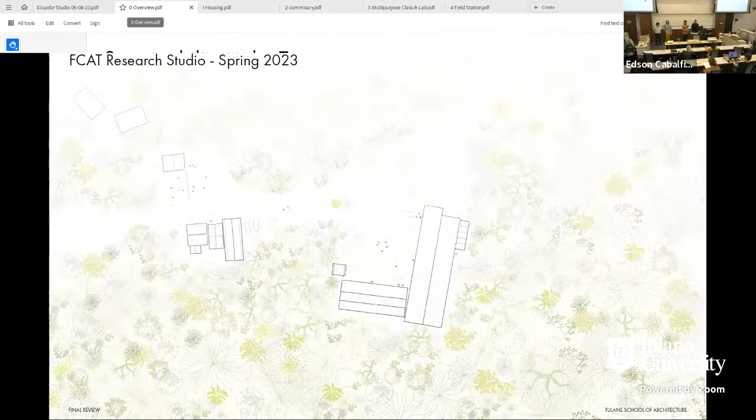My name's Tom. Thank you for being here, both in person and thousands of miles away in Ecuador. This is our presentation of work from our Architecture Research Studio at Tulane University. The studio focused on sustainability in the tropics. We were lucky enough to work with some fantastic partners at FCAT, or in English, the Foundation for the Conservation of the Tropical Andes. There are 13 of us students in this course whose work you'll be seeing today. Of the 13, 5 are graduate students and 8 are undergraduates. We all have various backgrounds and come from different parts of the country and world, but share a common love for design. Our professor is Dr. Edson Cabalfin, who has kept us on the right path since day one.

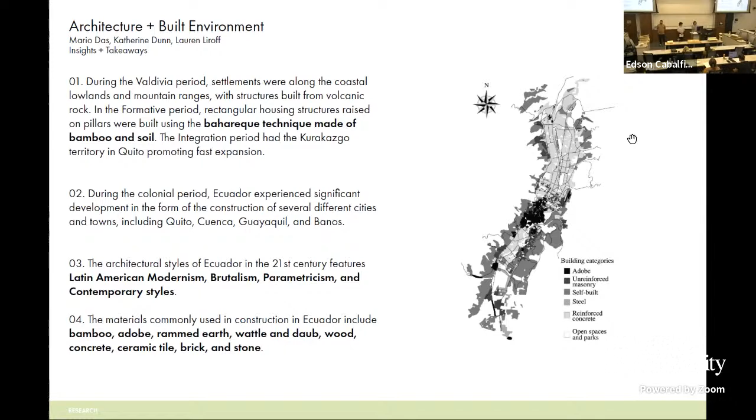Ecuador is home to some of the most biodiverse environments in the world. Esmeraldas alone hosts several different ecosystems, including mangrove, lower evergreen, and lower montane forests. Unfortunately, continued human activity centered around resource extraction has led to the destruction and deforestation of these incredibly unique regions. Ecuador's architectural history has been strongly influenced by the different periods of the country's history. Traditional building methods include the use of adobe, bahareque, rammed earth, structural bamboo, and more recently, concrete. The country's modern style spanned from Latin American modernism to brutalism and parametricism.

The second of the 2 research phases began to hone in on some of the topics that would be especially important to consider before moving into the design phase. This research focused on more human-oriented topics like decolonization and public interest design, before narrowing the scope to investigate more architectural topics like materials and the principles of construction for the region.

We first looked at the idea of decolonization as it applies to our role in this project, which can be understood for this context as honoring indigenous practices, decentralizing Eurocentric ones, and creating non-hierarchical power structures. Next, we investigated public interest design. We gained some key insights about how to make our designs human-centric and specific to their users. We also learned important information concerning the priorities of nonprofits and how good humanitarian design should advance the abilities of nonprofits by improving the existing spaces and facilities.

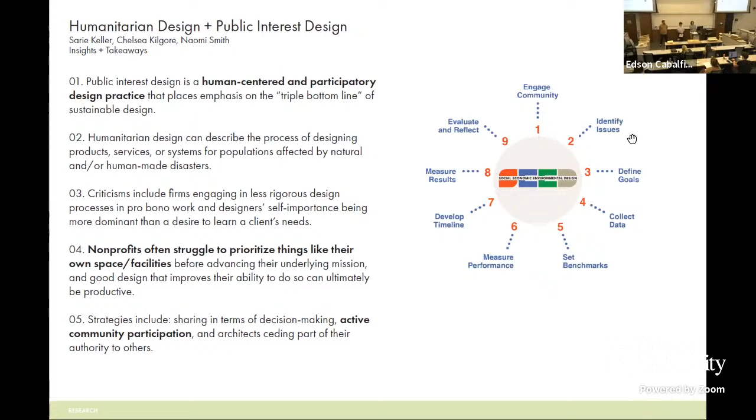We then dove deeper into specific construction methods and materials, as well as considerations for how we could implement them into our designs. Topics for investigation included structural bamboo, mycelium brick, bahareque, and concrete, most of which made it into the resulting projects in some form.

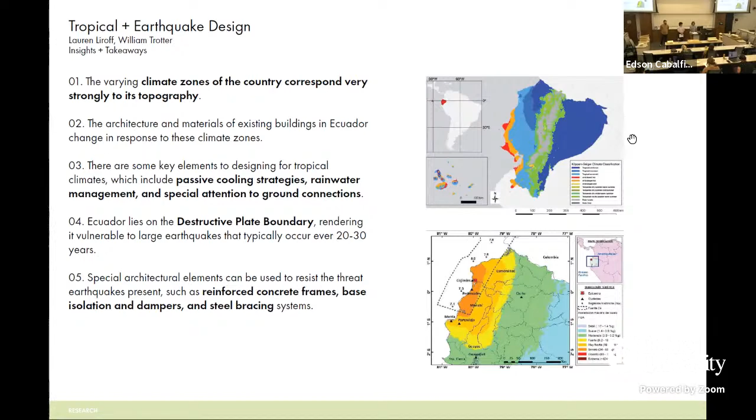I'm now going to hand things over to Anna Kathryn on Zoom, who will discuss some of our assumptions prior to our trip to Ecuador, as well as some key takeaways from our midterm proposals.

Thanks, William. The research was vital to our understanding of the site and prompted us with a few questions that led to our first design iterations. Before we visited Ecuador, we wondered about building materials, the rain and the mud, and what the topography was really like. We were also really lucky to have such amazing feedback from everyone at FCAT to help us through our design process.

About halfway through the semester, our studio had 13 different proposals. After conversations we had while in Ecuador, we've been able to consolidate our design ideas into 4 projects. I'll present the midterm work to show a glimpse into our design process throughout the semester.

The housing group initially explored designs to house all different users, including FCATeros, students, and ecotourists. Each proposal occupied a different site on FCAT's grounds, from the bottom of the hill to the very top, even a series of buildings that expanded into the forest. Some provided a lot of privacy, while others had less privacy for more people. Each design carefully considered the topography and reacted to the environment thoughtfully and creatively.

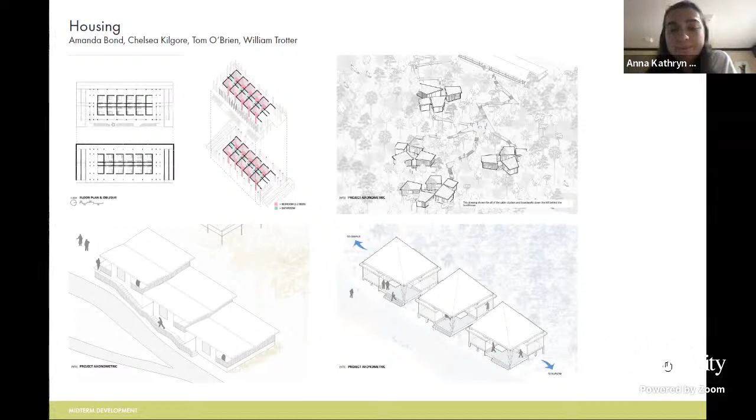Next, we had a few new ideas for the commissary. One proposal focused on retrofitting the existing commissary and adding garden space adjacent to the kitchen, increasing functionality and structural stability. The second proposal relocated the commissary down the hill and converted the existing commissary into housing. This created campus zoning, where the upper campus is designated for sleeping and the lower campus supports gathering, eating, and socializing.

The intent of the multipurpose classroom centered around spaces to be. This proposal focused on creating a flexible space that is open with potential for smaller private spaces to relax when not in a class, dining, sleeping, or conducting research. The new multipurpose classroom creates a new quadrant in connection with the existing commissary and bunkhouse. The main goals were to create a flexible space for meeting and relaxing, a dedicated lab space for local and visiting researchers.

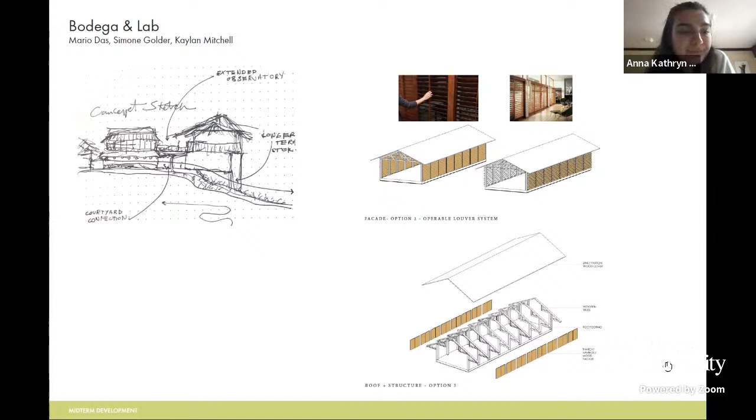Finally, we have our field station designs. The original proposals were 3 different forms suited for 3 different users: one was a researcher, one an FCATero, and another the ecotourist. While there were specific amenities associated with each user, the main point of each field station was so that it could be a small, multifunctional unit that could be placed in many different site locations, and even more remote ones.

So in response to the feedback on these proposals, some questions that arose included what facade system would be effective against the bugs, humidity, and rain? Is FCAT interested in exploring ways to use local materials, or would they rather stick with concrete? And what is the day-to-day life of the FCATeros like? All of these would be addressed during our trip to Ecuador to visit the site in person.

So we spent our spring break in Ecuador getting to know the site more intimately. At FCAT, we learned about their reforestation work, measured the topography, and got to see many parts of the reserve. It was valuable to spend so much time with the very people we are designing for, which helped to understand the very specific needs of the place. This and ground truthing our initial assumptions were the most important parts of the trip.

We all presented our work to the FCATeros, which is where the most significant feedback arose. They shared their opinions on materiality, siting, and overall arrangement of the site, often making points that we had yet to consider, such as the need to play music before meals.

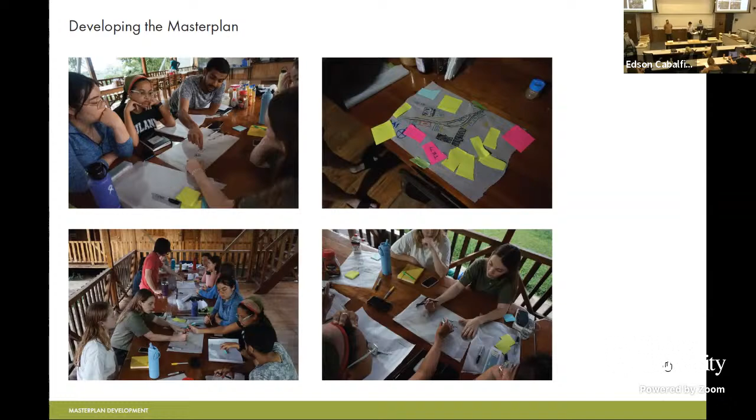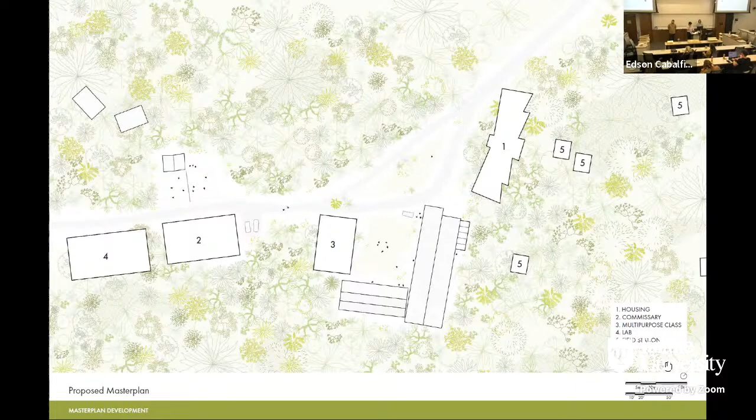To further explain each individual proposal, we will walk you through a day in the life at FCAT: imagining someone waking up in a new housing building, eating breakfast at the commissary, taking a class in the multi-purpose space, and then going out into the field station to complete some research.

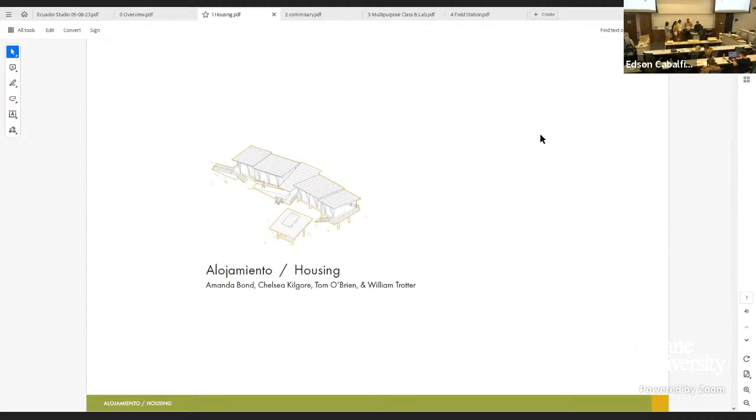Amanda, William, Tom and I team on housing. The first thing FCATeros would experience in a day in the life at FCAT is waking up in their new housing. While in Ecuador, our group discussed previous housing proposals with the FCATeros and learned a great deal about what spatial characteristics were important to provide. Our discussions had central themes of privacy, material longevity, and social gathering space, among others. As a result of the feedback, we pivoted to designing housing specifically for FCATeros.

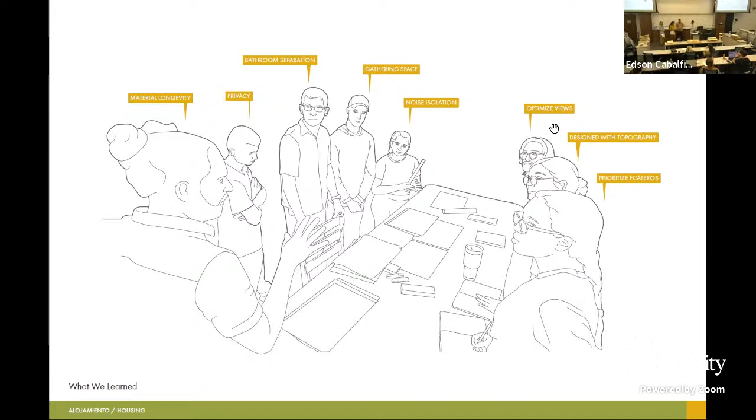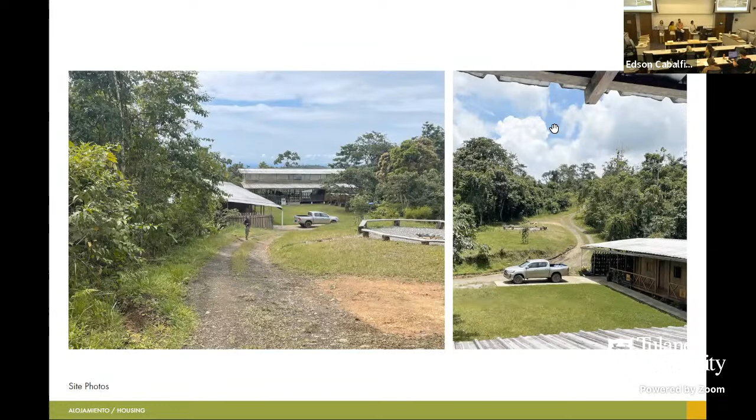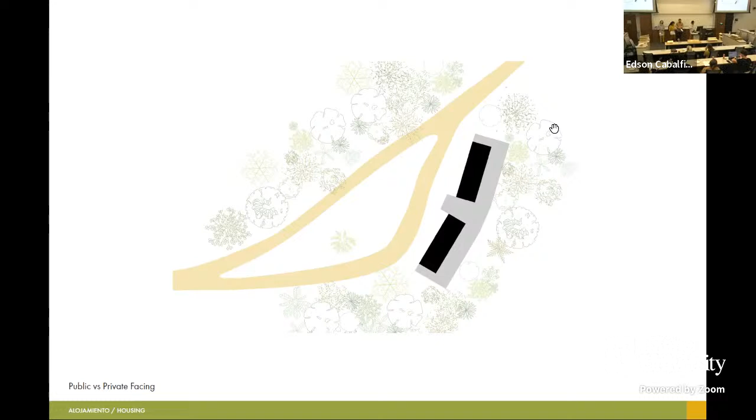From there, the massing was split in two to create a breezeway condition and a central gathering space, which was deemed requisite, similar to the existing house. The design was then separated into public and private spaces, with private rooms along the front face of the building, shown here in black, and more public space facing out into the forest, shown here in gray. The floor plates of the building were then fragmented and terraced down the existing slope of the hill, conforming to the existing topography of the site. Each floor plate was slightly angled to create directed views into the forest.

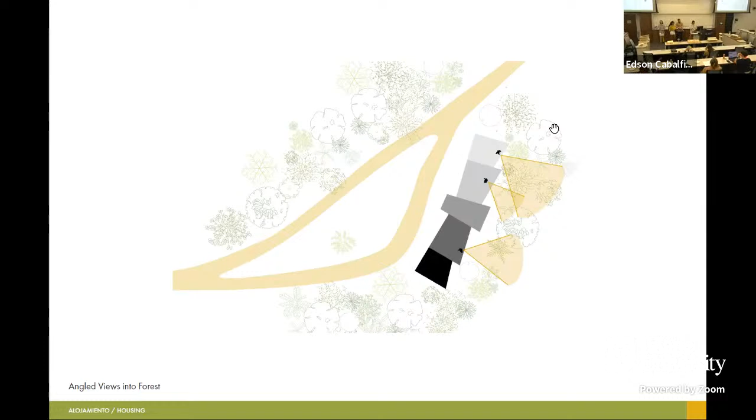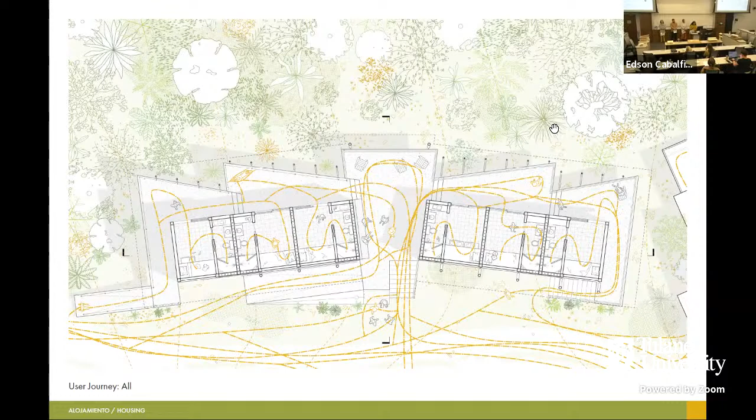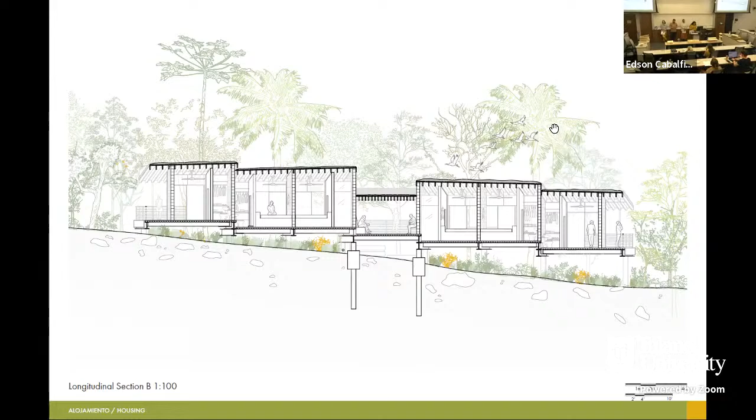With the orientation of the roof slope, shade is provided to the interior rooms and balconies throughout the day, allowing for a more diffuse light condition through the clerestory windows and sliding doors. Thatch roofing also ensures that the corrugated steel roof deck is not exposed to direct sunlight and heat, thus keeping the interior cool throughout the day, but retaining its insulating power at night.

It also becomes possible that the roof area may be utilized for solar panels to provide energy for the house. The roof slope also allows for rainwater retention systems to be implemented, where rain runs down the roof into gutters, down through the column, and into a storage tank installed in the building.

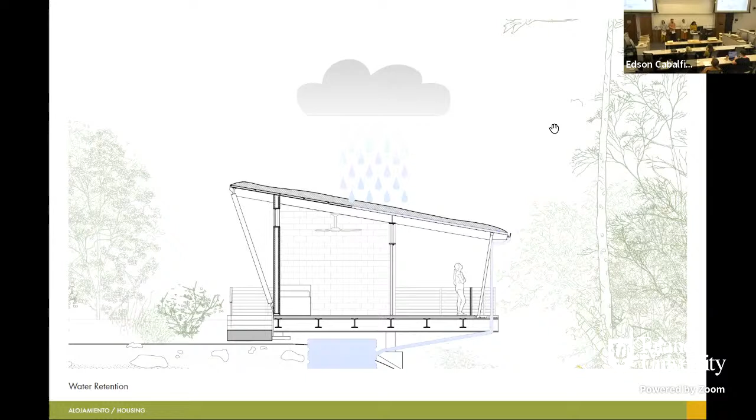There are also passive ventilation strategies implemented, where hot air may leave the room through clerestory and awning windows on both primary facades, allowing for cooler air to enter the doors. There are also active ventilation systems in the form of ceiling fans.

Which brings us to the construction methods used on the north-facing facade. The primary floor structure involves site-cast concrete footings, which then support a corrugated steel floor deck and concrete finished floor. The main structural walls are made of CMU, and a double-skin bahareque system is utilized for the non-structural walls. The bamboo cross-braced columns, held by steel pin joints, are a major facade element.

The cable railing is also utilized to minimize interference with views. Lastly, the roof involves the use of CLT rafters, on top of which is a galvanized roof deck, wooden purlins, and a thatch.

The balcony side utilizes similar strategies as the roadside facade, with the exclusion of the bahareque. Instead, wooden and glass sliding doors are utilized to be able to open or close the window outside. Furthermore, a steel gutter is used to connect the PVC piping that runs through the bamboo columns, making up the water retention system.

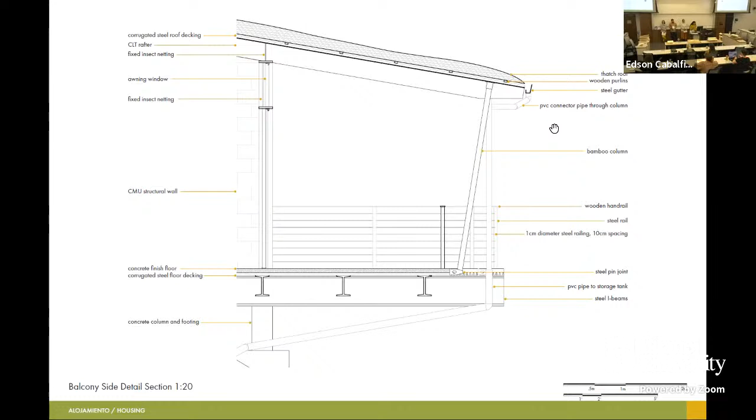And here we can see the material palette of the structure as showcased in the details. Thatch for the roof, CLT for the rafters, corrugated steel roof and floor decks, CMU and bahareque for the walls, as well as bamboo for the columns.

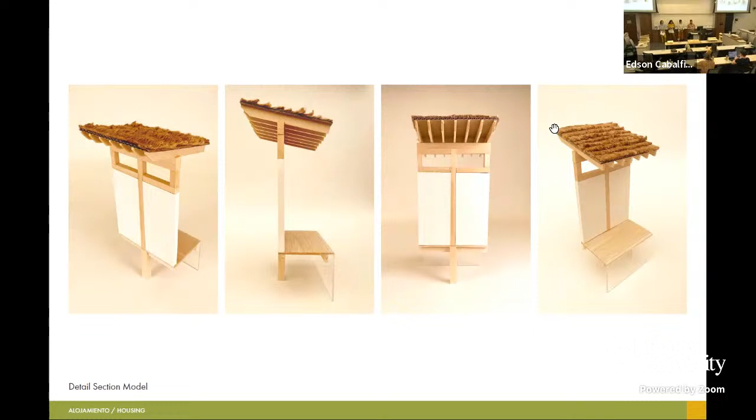This section model shows the cross-laminated timber structure. The walls depicted here are not hollow cavity walls. Instead, they are bahareque infill. The roof joists support a layer of plywood and a layer of steel decking that is then enclosed by thatch.

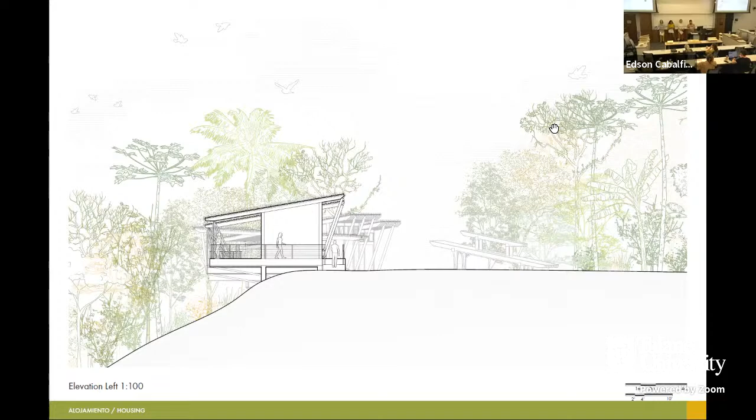The elevation of the left side of the building shows how it drops down and curves around the site as you approach the main campus from the top of the hill. A ramp in the front of the building leads to an accessible bedroom unit in the back.

The back elevation shows the social life of the building. Private bedrooms face out towards the forest with large sliding glass doors. In this drawing, you can see how the thatched roofs drop down with the landscape and collect water for the retention tanks that sit beneath the large central gathering space.

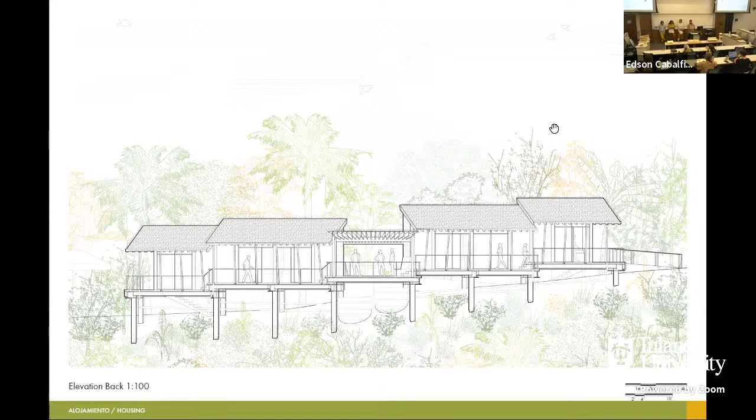A thatched roof acts as a noise buffer against potentially loud rainstorms. Four of the roof structures slope down toward the forest, stopping the sun from heating up the bedrooms, while the central roof opens up towards the forest, allowing for greater views.

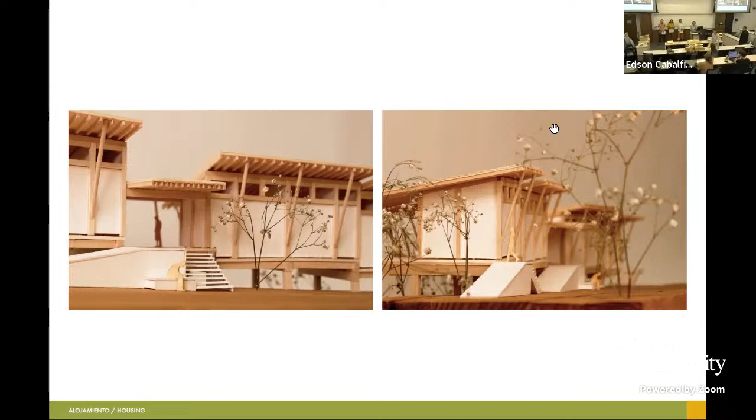On the other side of the model, we get a glimpse of the balcony experience as it hovers over the steeply sloped vegetation. You can also clearly see how the roof lines correspond to the ascending floor plates, with the exception of the counter-sloping roof that projects out from the central space.

Last, we get a dramatic look from below, showcasing some of the substructure that achieves these seemingly hovering cantilevers. We also can see a glimpse of how the balcony might be experienced in perspective. The sloping roof supports create an organic wavy effect.

Moving into the perspectives, we get an idea of how the design may actually be experienced. This view shows the building's relationship to the rest of the campus just down the road. The design invites people to come and go as they please, with stairs and ramps running parallel to the road, and the main entry projecting outward, beckoning you to enter. It also showcases the shading effect of the roof lines and the privacy achieved by the high windows that face the campus.

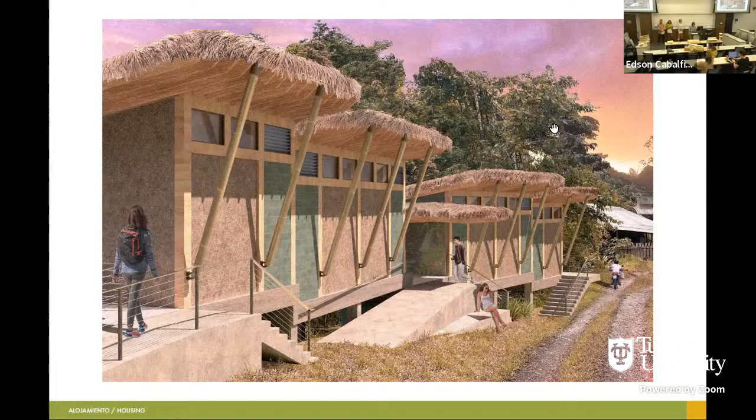The balcony spaces provide ample room for socializing, bird watching, or even hammocking, as you can see toward the back. The large sliding glass walls of the bedrooms offer unobstructed views out toward the forest, while curtains provide the option for extra privacy from this path of circulation, if so desired.

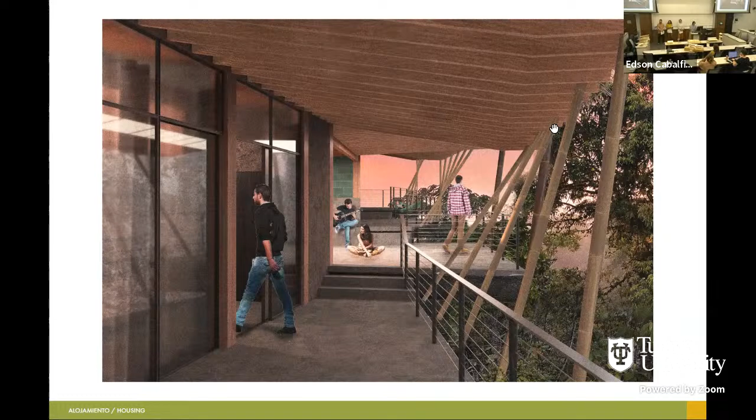This drawing shows the building again, located in the context of the site. And from there, one could walk down the hill to go see.

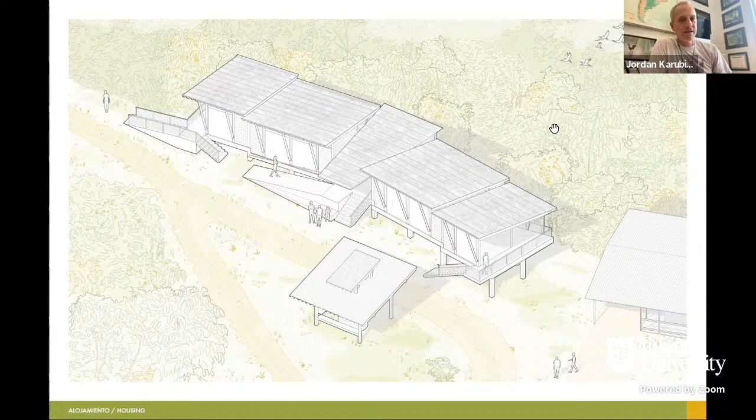The question I had is, with this structure you're showing here, have you thought about housing for men and women in particular? Is that a theme you've thought about, whether it would be intermingled or whether there's separate blocks depending on gender? Well, right now it's designed to be mixed gender, but because it's split in the middle, it could be divided into men on the left and women on the right as one option. But right now we haven't designed it specifically for a gender divide.

Okay. You mentioned glass, and I wanted to ask, because I don't know what group is going to talk about it, but I'm assuming there's going to be a group that talks about the challenges of glass that birds fly into. So did you all think about glass as windows? I'm opening that up, I don't know who I should ask that to, but I know it's an issue.

So we tried to keep most of the glass on the more protected facade of the building, and in addition to that, there are glass options available to be coated in special reflective materials that signal to birds that there is a surface there. So there are ways to counteract that. There would still require some cleaning and maintenance of the glass, but nothing major. And is it available in Ecuador? Yeah, that was supposed to be, yeah.

I'm curious about the material choices and structural systems you guys are deploying, because it seems like you've decided to add a little bit of all the systems. You've got a cast in place foundation, a poured in place concrete floor, a CLT structure, and a thatched roof. Is that right? Yes. Can you talk us through the decision making there? I can kind of understand the pieces and parts, but also the logistics of these different types of materials. I can see some benefits and some drawbacks to your approach, and I'd love to hear you talk through your decision making process. Yeah, I mean, it is quite the mixed bag, right?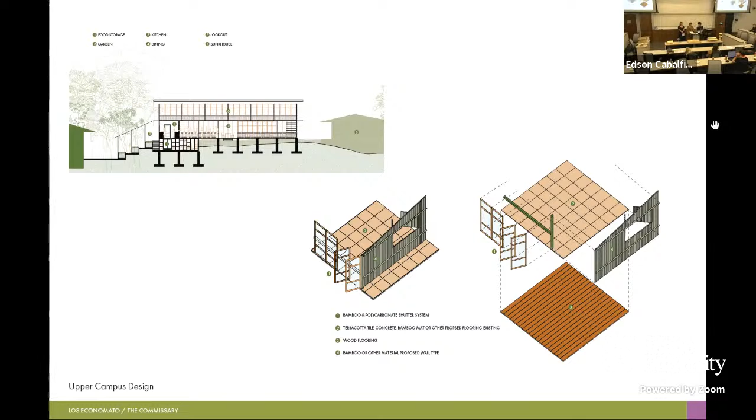We understood the importance of thoroughly evaluating the structure and its limitations. The upper campus scheme acknowledged the current building's limitations and aimed to optimize the space by redesigning the layout and addressing structural issues. This approach aligned with the principles of sustainable design, encouraging maximized use of the existing structure and resources to minimize waste.

On the other hand, the lower campus scheme presented an opportunity to envision a new, purpose-built commissary that could better meet the needs of the community it serves. It was also financially more sustainable regarding the need to address issues with the current commissary annually.

In the design, the additional housing for the cooks helped improve the quality of life for the staff, increasing satisfaction. Moreover, the larger kitchen and extensive storage space helped enhance the quality of food preparation and experience for students, faculty, and staff.

Following our meeting, once we finally went to Ecuador and met with the kitchen staff in EPCAT, our group gained a deeper understanding of their requirements. Based on these insights, we decided to proceed with the lower campus scheme to address these needs.

In terms of determining the location of the commissary on the lower campus, we addressed various factors, including proximity to the existing kitchen and dining areas, accessibility, and available space.

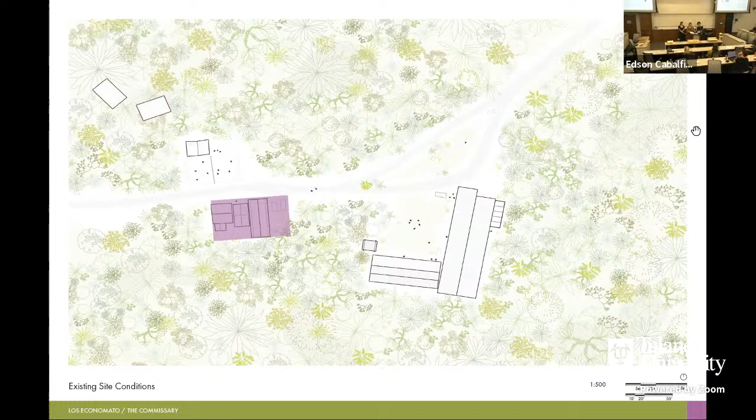After careful consideration, we identified a relatively large area of flat land located across from the Ecuavolley courts, where the nursery and composting beds currently exist. This location presented an opportunity to repurpose the space for the commissary to better meet the needs.

The design locates the front of house space closer to the main road and pathway connecting the upper and lower campuses. This placement facilitates easier access for visitors and also promotes a sense of openness and welcoming.

Conversely, the back of house space is positioned closer to the trees and vegetation, creating a visual buffer between the private and public areas. This placement helps shield the private areas from public view and ensures a greater degree of privacy for the occupants and cooks.

Moreover, the public dining space is designed to be very open, providing a welcoming atmosphere for diners. The layout is arranged in a manner that optimizes traffic flow and facilitates easy access to different areas of the dining space, creating a more inclusive and active environment.

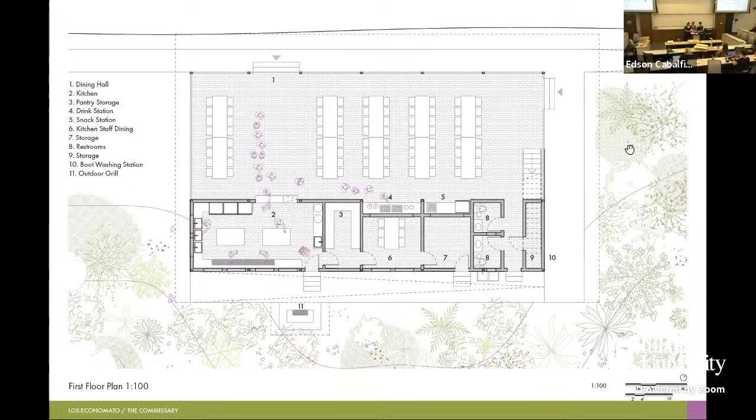Something to note here is the relationship between the kitchen and dining space. The cocineras explained that a snack fridge separate from the kitchen would help them feel less disrupted when the efecteros need to grab some fruit or food to go, which also makes this food more accessible to the efecteros and visitors alike.

The large opening between the kitchen and dining space allows the cocineras to see clearly into the dining room, which they explained was necessary to ensure that everyone gets a plate at meal times.

Within the kitchen, it was clear that they needed additional fridge space, additional counter space, and ample burners, all shown here, along with more additional appliances and additional sinks for washing, prepping, and so on.

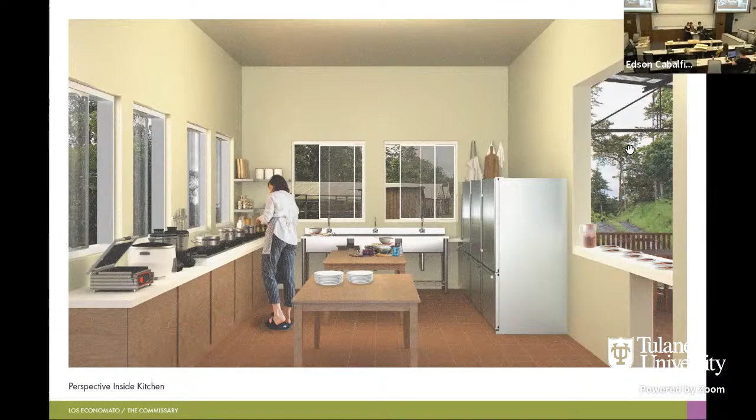The second floor serves as housing for the kitchen staff, with comfortable accommodations for up to 9 staff members, including a private bedroom for the head cook, Maria. They share a restroom with 3 water closets, 3 sinks, and 2 showers. A communal balcony on the far left side provides space for staff to relax and enjoy the views after work.

Within the bedrooms, there's enough space for all the cooks to sleep and store their personal belongings. Since the openings are oriented away from the road, they can take in the view of the trees and have some privacy. Like the existing bunkhouse, the beds include nets to protect from mosquitoes, and the operable windows are screened for the same reason.

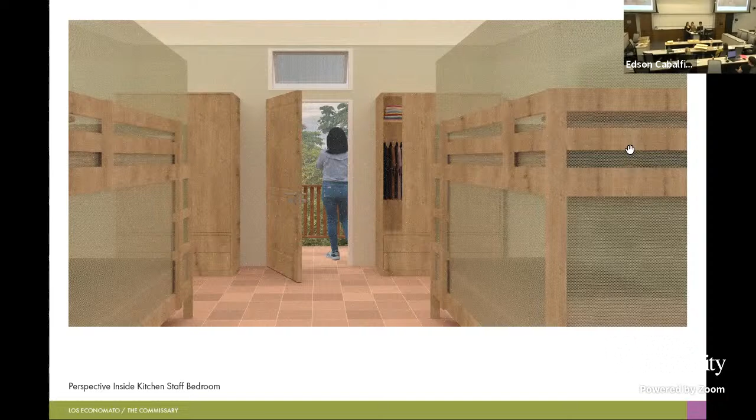Along the road, the commissary is placed at the edge of that flat clearing we mentioned earlier, at the base of the hill to the upper campus. An ample overhang covers the path in front of the commissary. A terrace garden could be constructed going up the hill to improve food production as well.

Another chef joins to cook, entering from the kitchen's folding counter in the main dining space before cooking at one of the 2 islands. A few members of the kitchen staff join to cook, circulating between the stoves, fridges, and sinks, creating this triangle, which is well known and good for workflow in a kitchen, while keeping that in mind when designing the kitchen.

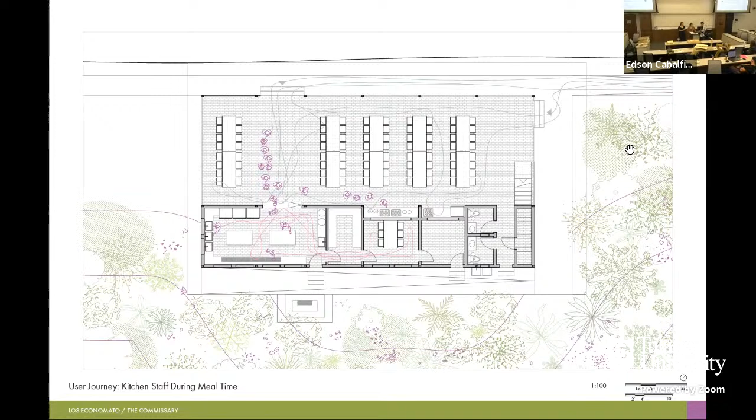When the Epicateros return after a day working in the field, they'll come to the boot cleaning station where they'll take off their boots, spray them down, and then be able to enter this space.

This drawing offers a cross-section view of the building, highlighting the separation between the public and private areas, while also providing a better understanding of the roof plane. This section provides valuable insights into the building's design, showcasing its ability to seamlessly integrate with the surrounding environment.

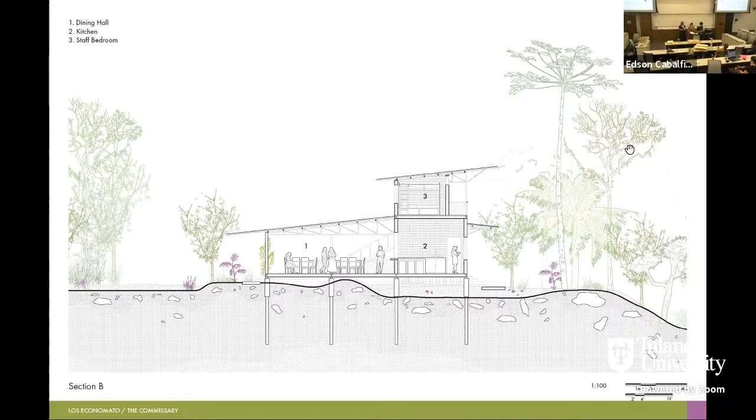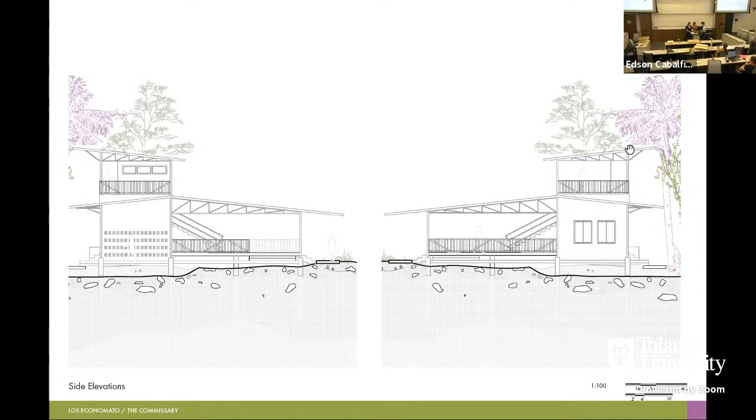This is the front elevation of the building, and it expresses the solidity and openness with the windows located strategically to allow light and airflow, and transom windows are in the more private walls, such as the storage rooms and restrooms. The two side elevations display the ceiling, roof, and structure construction. The back elevation emphasizes the openings for views and airflow circulation.

The back of the building is designed to be more private, with a focus on the internal program areas and the views to the scenery outside.

The new design aims to create an efficient and functional space for the commissary, with careful attention paid to circulation, program proximity and exposure, kitchen staff needs, and the comfort of staff and guests.

In Axon, you can see all of the roofs are tilted to allow for rain flowing off the building, with an ample overhang in places where people need to walk. The orientation of the largest roof planes is such that solar panels could be added in future years, addressing the energy needs at FCAT. Structurally, the exploded axon begins to show how the building is assembled.

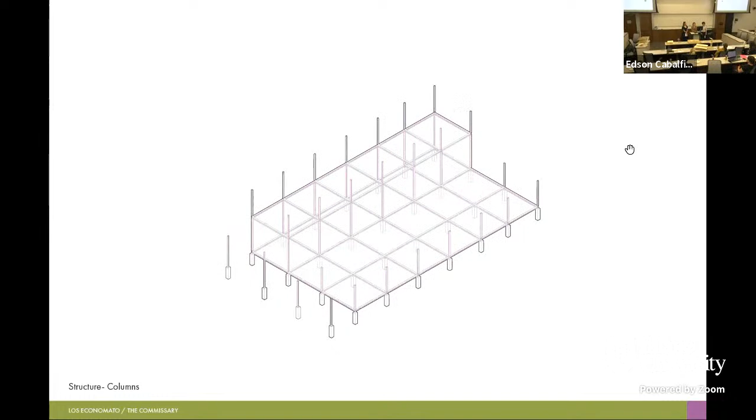Going into the assembly of the building, you start with the footing, the beams and the girders, the columns, trusses, purlins, and the roof plate.

Looking at the materiality of the building from the ground up, we decided terracotta tiles would be a great use for the floor after talking to the kitchen staff, because they're both replaceable and durable. Looking at the walls, we decided to use fiber cement sheeting because it works very well with the conditions and is easy to assemble and work with, with a waterproofing membrane additionally for the humid, wet environment.

We have simple steel gutters connected to the corrugated metal roof. For the windows and screens, we would have a bug screen on one of the outer layers of the window, as well as an operable single pane window.

Ventilation is really important, especially in cooking, because there's a lot of heat generated. In the kitchen itself, there are multiple windows that allow flow through both the dining space and those open window spaces, and the stoves will be located near these windows so that when they use the LPG, they can open them. Same goes for ventilation above.

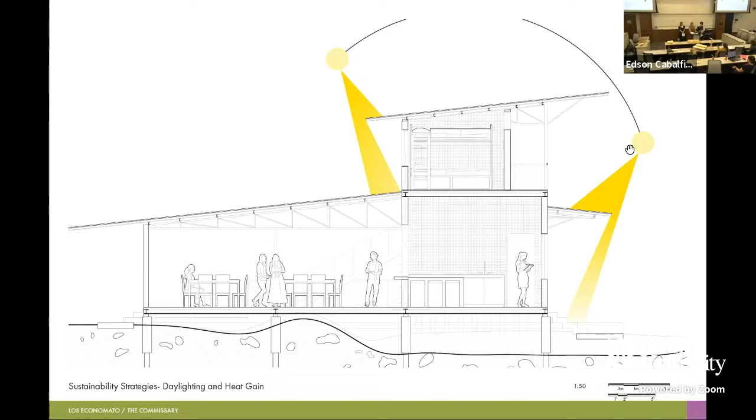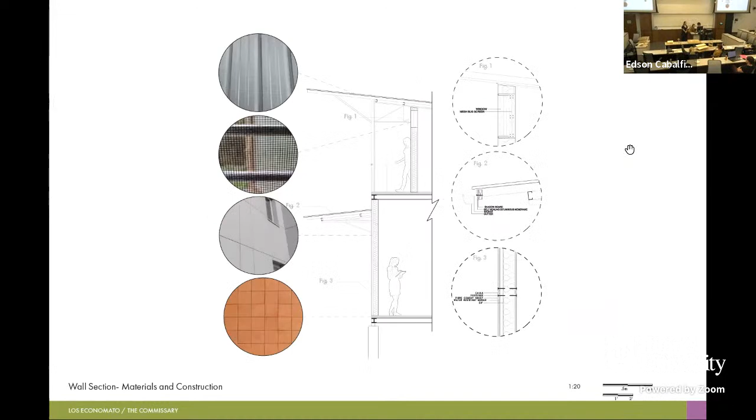Over there, you see? You need to break for the roof, and maybe it's an option to have some kind of light well or whatever, but there needs to be a solution, otherwise you need to rethink your stair, okay?

And that's so important, because sometimes we make all our plans and then when you're on site, it's like, okay — we did actually struggle with that as we were modeling. So that's one of the things you need to fix a little bit.

And the ramp entry — I think you may have had that in your drawings, right? There's a big opportunity to fix that handrail a little bit, so it's not touching. Maybe you extend that wall a little bit to protect the entryway a bit more. That's one thing.

The other thing — I know you've been working a lot, so many proposals that I've been hearing, and I'm wrapping up a couple of points just to help improve it. I'm not saying your project is wrong, because it's so beautiful and wonderful, but this is when you need to think about how we can fix that.

How is this handrail going to work? Is the same wall going up or not, or maybe it's a kind of flat roof and then start building from there? I don't know.

That's why it's also important to make a model, because in a way you can find out some of the things you can even improve. It's an interesting thing, the model.

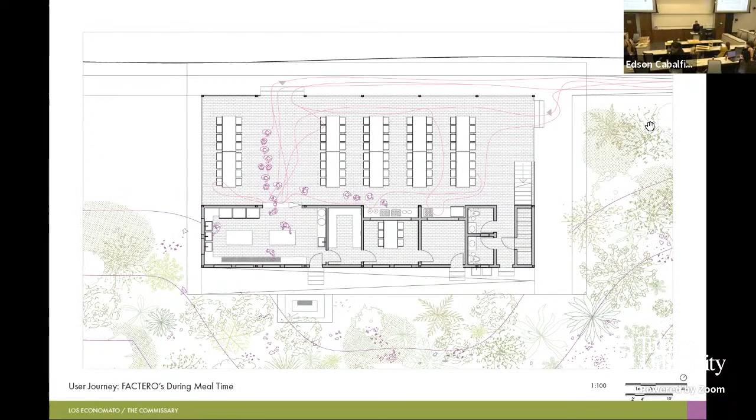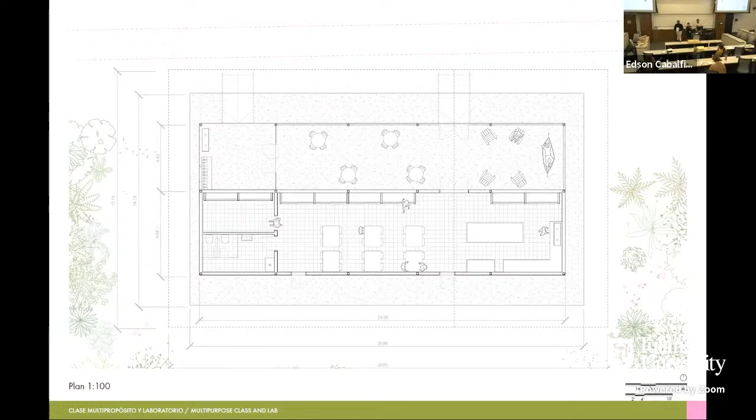Looking at the lab plan, this is a little space proposed for the lower campus. It's fully conditioned with a lot of space for storage of very sensitive equipment that the FCAT researchers use. It's right on the main road with ramped access, so researchers can drop off anything sensitive before making their way to the bunkhouse and other parts of campus. It's also farther from the bunkhouses so that lab work and researchers working at night won't disturb anybody there.

Here's a closer look at what's actually inside the lab. There's a boot rinse station outside, some outdoor working space with a screened-in porch, a sterile room for different material samples and biosamples, bathrooms, lab space, tons of equipment, and storage space.

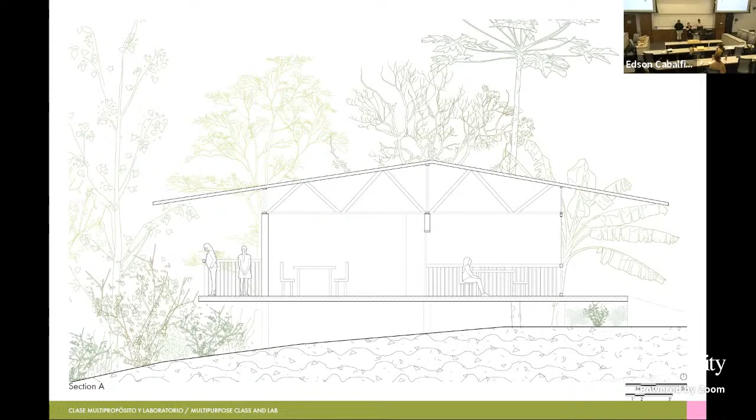So looking at the section here, you can kind of see how the internal space is sandwiched between these two outside areas, one screened in, one an outside open observation deck. Kind of a crazy roof overhang again, trying to keep the sun off the building. Not a ton of lines of sight between the internal lab space and the rest of the campus, but there are clerestory lights or windows all around, so you can still get that diffuse light in.

It feels scientific. This other section is looking at potential furniture layout, different stuff that could go in there. The sterile room has locked cabinets, and we have a ventilation hood in there. We talked several times about the types of equipment they would like to have, so I tried to accommodate some of what they had requested.

The south elevation, I kept the south and north sides fairly small. The south side was making me nervous with solar orientation, so the building is also shifted a little further to the north side to give a little more overhang to the south side.

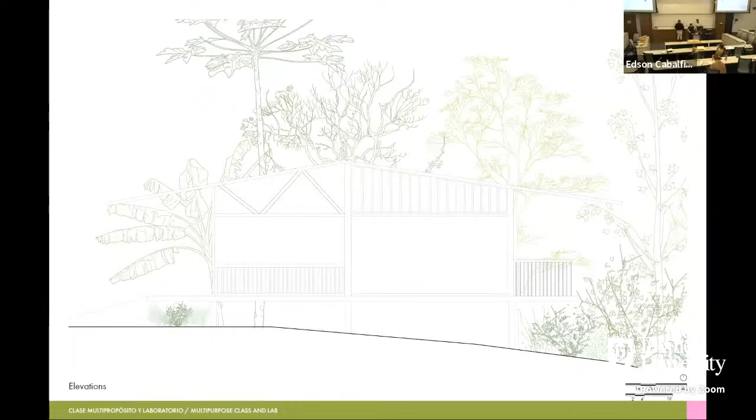Elevations, the top one is as seen from the road. But it's... sorry.

So thinking about the placement of the multipurpose space, which is up by the existing commissary and bunkhouse, we wanted to utilize the back slope of the hill to propose additional storage for more long-term equipment, that also faced the forest and had a balcony view, but also could be used for water storage or housing, depending on the needs of the campus. It could vary, but it's currently proposed as storage.

And then on the ground floor plan, just showing a multitude of spaces and how they could be used, trying to explore how different activities could happen at once in the space and serve the needs of the campus. So having a larger space that could accommodate a large classroom, general meetings, or a movie night, or something relaxing, as well as more intimate spaces like the library, a conference room space, and then the enclosed back patio space, along with a covered but exposed patio space on the side that creates a connection between the existing commissary and the proposed multipurpose.

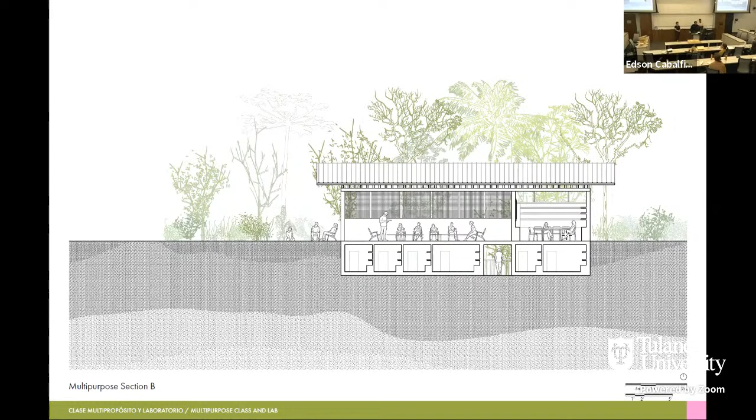Looking at the elevation, I think this shows the connection between indoor and outdoor, as well as the louvered front half of the facade to show variability of what could go on, as well as the covered walkway in the space. And then the side elevations show more of the connectivity with both the campus and the back half of the forest, and that multi-level use of space.

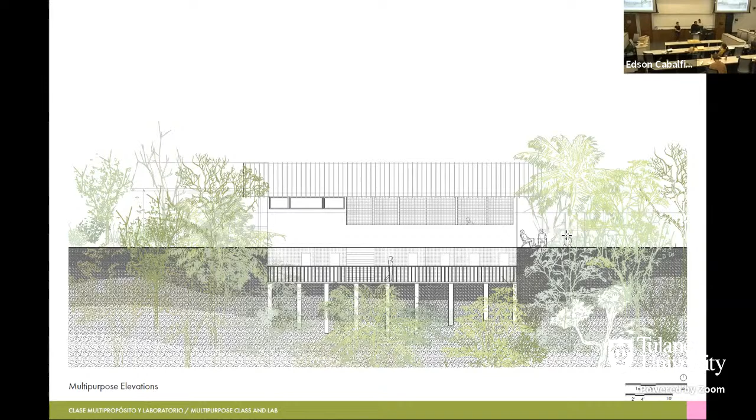So this drawing shows the relationship between the interior of the multipurpose class with the exterior, the way in which the multipurpose interacts with the slope, proposed walkway, and viewing deck at the back of the forest.

Looking at the structure of the building, the multipurpose class sits on a concrete pile foundation with a concrete floor plate. The storage area is made of concrete walls to ensure there is no threat of equipment stored getting wet. The multipurpose class above the storage area is a combination of concrete walls and operable wooden louver facade, allowing it to be enclosed and used for private meetings, as well as opened up for informal events.

The leisure deck is covered in a transparent screen to protect users from bugs and enjoy the space throughout the day. The clerestory on top allows natural light to enter the space, even when the multipurpose is closed for private meetings, classes, etc. The roof is made of a corrugated metal sheet that is easily available, with a soundproofing sheet below to reduce noise when it rains.

The lab is a steel structure with gypsum board and insulation panels for the walls, allowing activities that take place at night in the lab to do so without disturbing people in neighboring buildings.

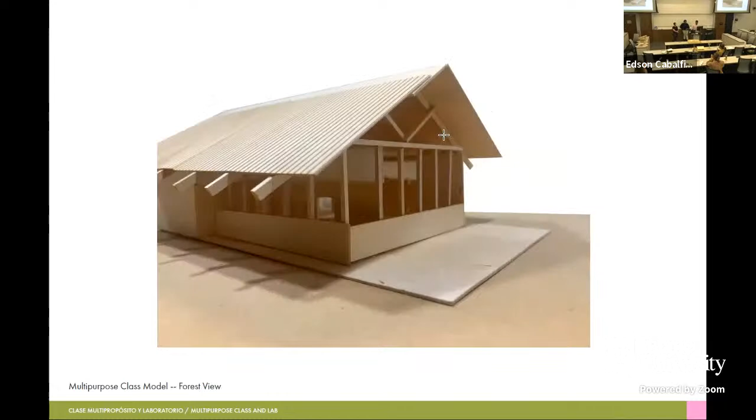Here are physical models of the multipurpose class. This is a wall section of the operable wooden louver facade. And here's a little bit of the experience.

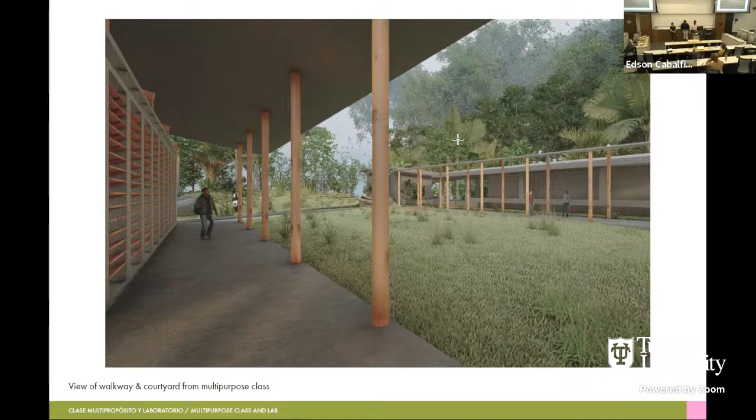And this is a view of the multi-purpose class deck when it's being used for leisure activities. And that was our proposal for the lab and multi-purpose class. Thank you.

Wait, is it enclosed or open? The multi-purpose class? There's a back half that is enclosed and then the side is supposed to be open, but covered. Oh, I see, where the table and desks are.

I think both of these structures are handsome in their own simple handsomeness sort of way. And I'm wondering if there's perhaps a missed opportunity in how prominent both buildings are in the site approach, there's some way to welcome or introduce FCAT or something, especially in the lower building, which was the lab. And even this guy, which is on a hill, is a super visible kind of gateway in and of itself, even if you're passing the new commissary and the new lab and all of that. So I wonder if y'all have ideas about how these structures are part of the welcoming or signage, or some of that part.

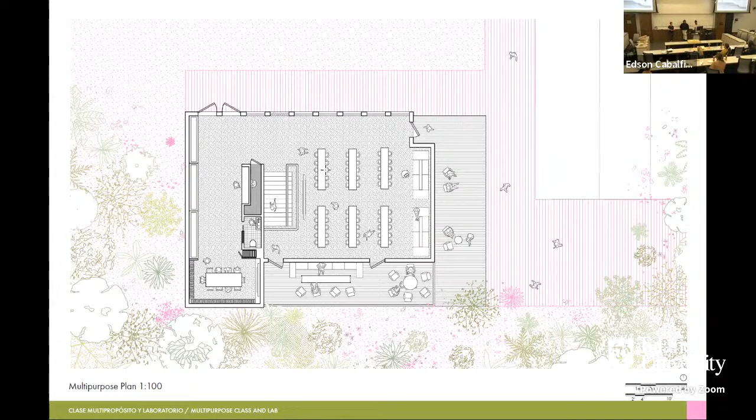Go to one of those views that shows that, just so. Approach, that one worked.

Yeah, so that guy - I mean, you're coming from the lower elevation up the hill and you see this big building. And I guess I'm wondering if there's a way to have like signage or color or mural or whatever, like a welcoming presence. And I think that extends also to the lab, which is actually the first building you would see in this scenario.

Yeah, I think there's a lot of opportunity on that blank sidewall for something like that. I think we chose not to develop that facade as much, thinking more about the wind and the rain. So I think that could be an opportunity for some type of welcoming signage. For sure.

Or even an extension of that, thinking about local networks and economies and things like that we're trying to foster and engender here. It's almost like, where are the opportunities for co-creation on this welcoming side of the building with local artisans or something like that? To me, that's where it gets to be a really interesting conversation - what are the pieces and parts that we control, and what are the pieces and parts that we're collaborating on, to make this thing of its place and giving back to its place.

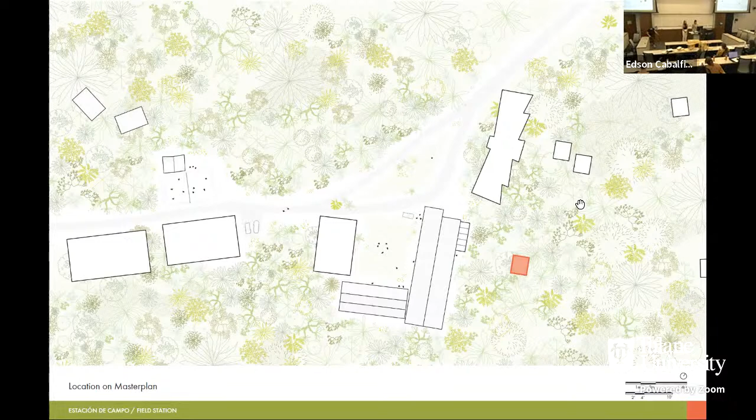The primary user we are designing for is the Efcatero, either for leisure or for work. While these stations can still be imagined anywhere on FCAT's land, we propose that a sort of prototype be built behind the bunkhouse here.

We identified the site because there is an established path and clearing, which is already being used to enjoy a private spot on FCAT's land.

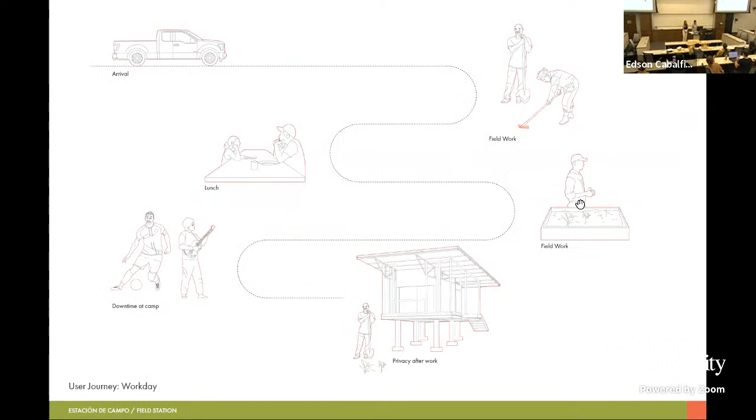We wanted to understand how these stations might fit into the daily lives of the Efcateros. The first day in the life starts when the Efcateros arrive for their 20-day shift, and these stations would be in easily accessible locations, such as the one we just identified, and connected to camp life, offering a quieter place to rest during the day or to sleep in at night.

The second vision arose from discussion about providing a space for the Efcateros to bring their families and enjoy the reserve as a sort of vacation. We imagined the lake as a great location for this, making the field stations an extra special place for the Efcateros to get some well-deserved time off in the beautiful landscape, and of course, wake up to views of the lake.

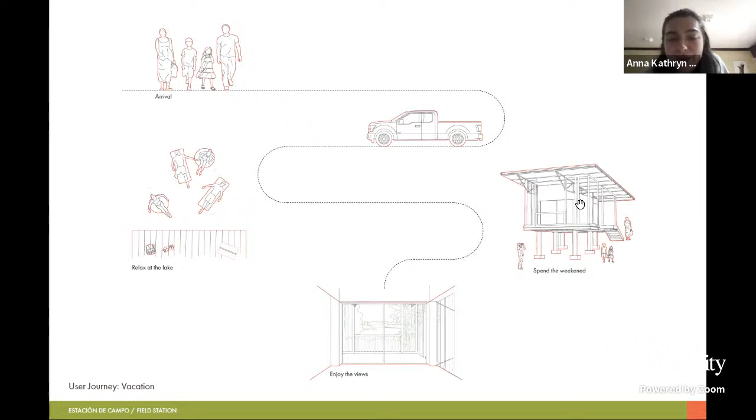And that's how we arrive at our design. We wanted to be very mindful of the orientation for this site specifically, but we also needed to develop a strategy to determine how the station can be placed on other sites. For this site specifically, we placed the solid walls towards the direction of noise and light from camp.

Users arrive from the back and along the side so that this covered outdoor space acts as a sort of filter before arriving at the private bedroom. Another need strongly emphasized in our conversations was the desire to maximize views, which we also try to do with these alignments.

Instead of incorporating the bathroom and the bedroom in one enclosed space, it was preferred to have them a bit separated. This way, if someone is muddy or needs to use the bathroom, they can do so without kind of trampling through the private area.

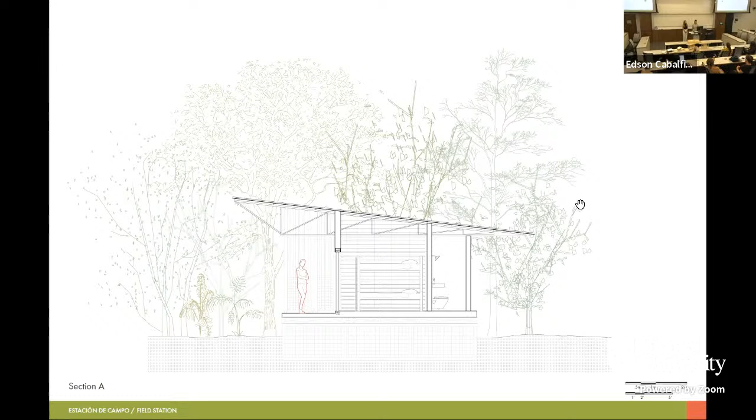So the spaces are enclosed in the north to south direction, again allowing for that separation, but cross-ventilated in the east to west direction. Looking at the layers, there's an enclosed bamboo screen, a netting on the southwest, and then louvers for sun. On the east elevation, there's again cross ventilation through the net truss with louvers as well.

And the screen is adjusted depending on the orientation, again for privacy as well as sunlight concerns, which we'll talk about.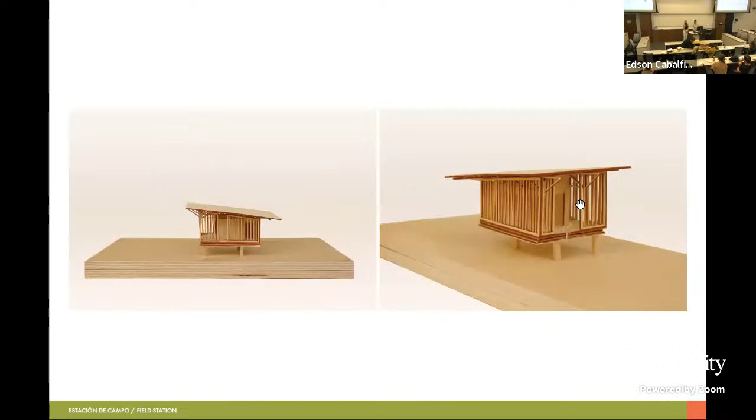For this proposal, we implement light gauge steel framing as the primary construction with steel structural members, and then we use corrugated decking with a concrete topping to make up the platform. Embedded pilotis raise the structure off the ground, making it versatile for various slope terrains, which was also another possible desire to have it situated maybe somewhere near the lake, which is definitely a lot more sloped than this first site.

So this sectional model at the 1 to 20 scale hinges open to further illustrate the various layers.

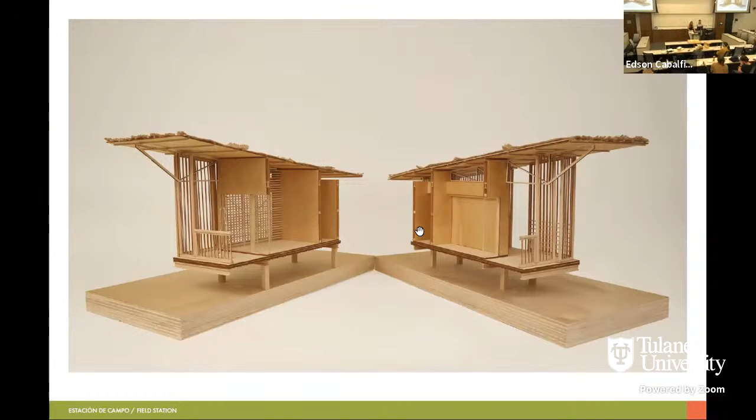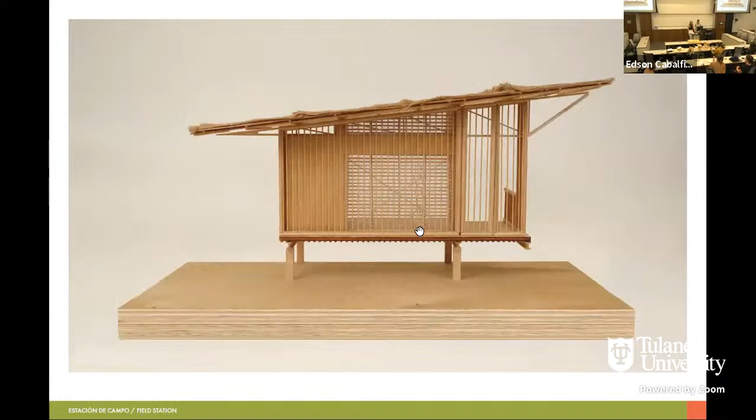So a bamboo screen is used for privacy, with horizontal slats for more visible or public facades. Select panels have the option of opening to maximize cross ventilation as well as views. Operable louvers also allow for control over sunlight and ventilation, and help prevent birds from flying into the glass, as previously stated.

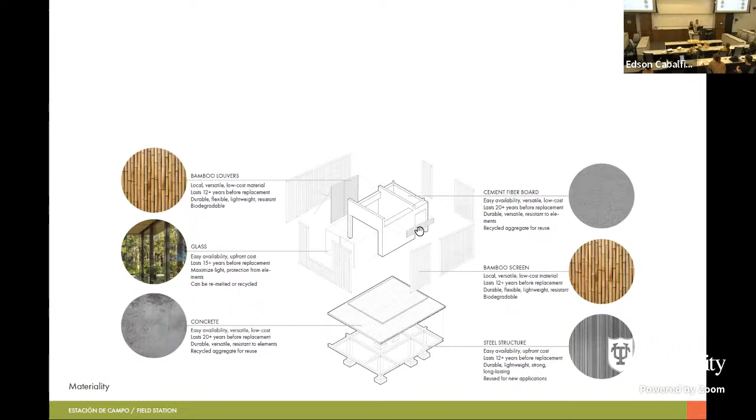Again, the platform is made up of concrete and steel decking, and the walls consist of light gauge steel framing with cement fiberboard. Different levels of enclosure are added on, such as louvers, glass inset from the edge to maximize views, and mosquito net to protect from insects. Control over privacy is included with a bamboo screen along the perimeter of the platform, as well as opening panels and variations in the bamboo screen pattern. The roof is made up of a corrugated metal sheet with steel purlins, bamboo battens, and a thatched roof, which makes use of local, sustainable materials.

Wait, it's thatching on top of corrugated? Yes. Is that pretty typical? It was identified that a corrugated roof would be helpful in keeping rain out, but it was noticed that it could be really loud—like when we were there it was torrential downpours—so the thatch would help with that, as well as help with insulation of the heat from the metal.

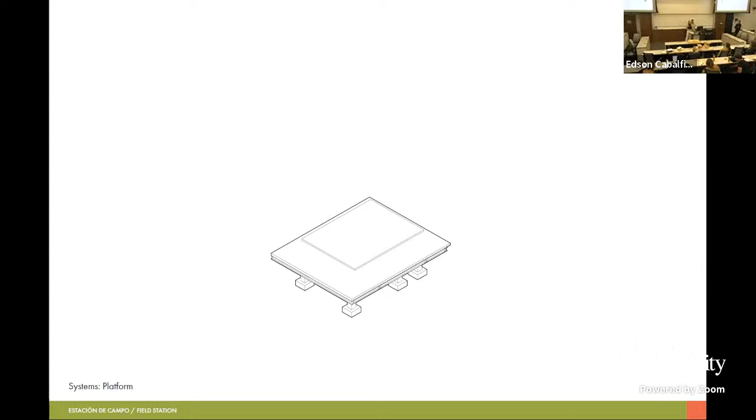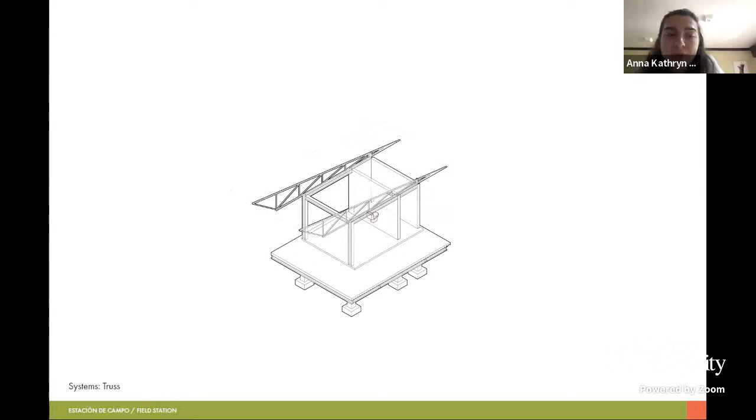We want to make sure that even if these stations aren't built all at once, they have layers to make them useful throughout the process. The simple platform offers a raised area to pitch a tent for camping. Adding just the frame and an enclosed toilet would be the next step during the building process, and the compostable toilet is a sustainable option that uses little water. The next option would be a fully enclosed structure with the roof, and the bamboo screen could be added later for more sun and bug protection while sitting on the porch. Finally, more sustainable systems could be added—solar panels could provide the electricity needed within these small units, and rainwater collection could be used for the toilet.

The last site planning option is extending the foundation piles so that the field station can be placed on any slope terrain. The bamboo screen, as previously mentioned, will help mitigate the birds and the glass, but there are also products such as etched glass and stickers, depending on the price we want to spend.

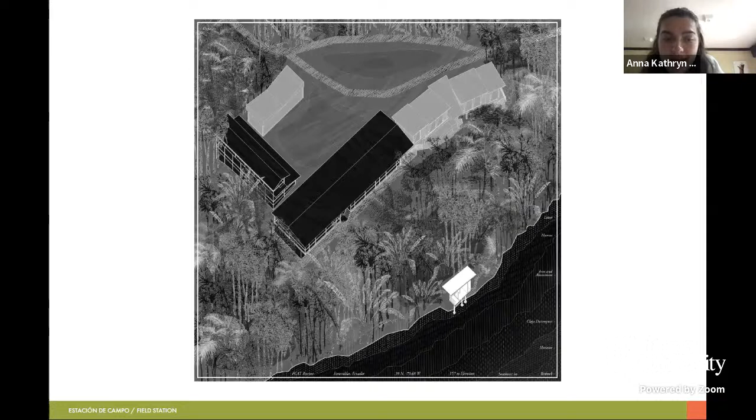This drawing just shows our field station at the bottom in relation to the existing and proposed buildings on the site—existing in black and proposed in gray. The story of FCAT has everything to do with the landscape, which we wanted to highlight here by conveying the soil composition, the tree types, the slope of the ground, and all the special buildings that make up FCAT.

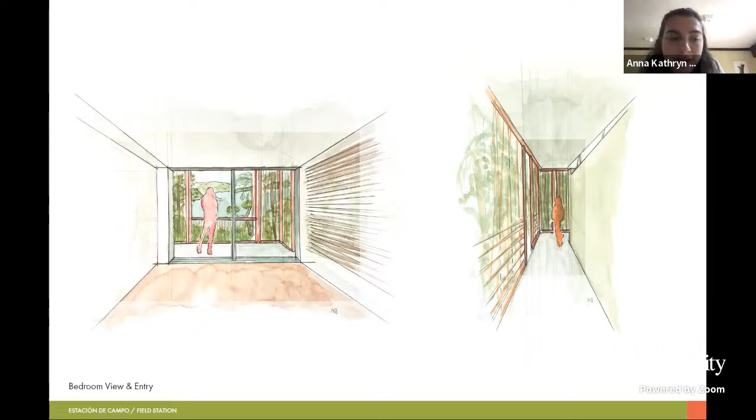Finally, the field station on the slope of the lake site could stand on tall columns, and the porch gives special privacy while still allowing you to be immersed in nature. Thank you.

Luis. Ellie, Eileen, do you have comments, questions?

I think this design is amazing, really, really nice. And I like what you mentioned about the birds, because this is actually a problem we have now sometimes with the big windows, because we need light and fresh air. So I think this is a nice way to avoid this problem.

There are translucent films that could be a temporary solution right now, right? I don't think that's a permanent thing, but I think there's probably an inexpensive way to address it. Yeah.

Yeah, and another thing is the reflection of the windows—sometimes it's tricky. But in my understanding, you are going to use wood, the organic materials outside, so this is great. Inside the forest, it's better not having reflections there. Yeah.

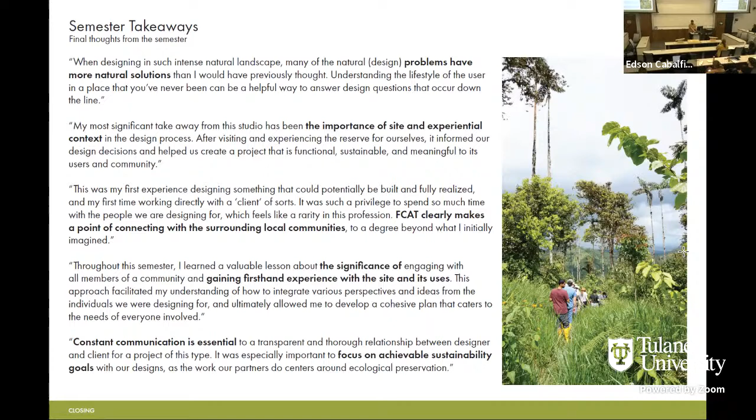I'm wondering how many of y'all are here next year? I know a lot of people graduate. I don't live here. So I feel like there's an important moment of knowledge transfer. Of course, the next group will have the folks at FCAT to talk with, and that's pivotal. But also having some moment of knowledge transfer where those of you who are still in town come give a little lecture at the beginning of the semester or something like that. That would be huge, so the next crew doesn't have to learn all the things you guys learned the long way, but they can learn it the short way. So if you could give us your time, it's not next fall, it'll probably be next spring. That would be super useful.

And I'm wondering if anybody's got stuff in mind, like things I wish I knew in the first few weeks that it took me a while to figure out. I mean, I think that list was a great start, but is there anything that would help you out if you knew it right off the bat?